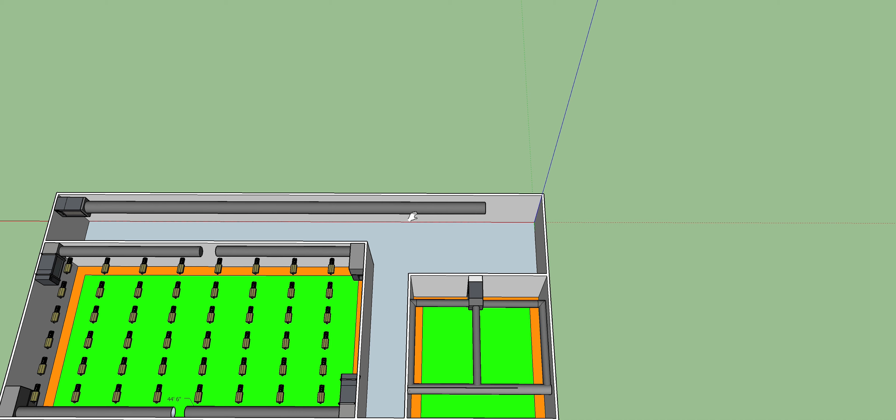Today we're going to cover the size of a craft grow space. So as you can see in this rendering, we've got a very densely populated flower room with some nice airflow out in the hallway with a nice 45-foot fabric ducting, as well as a dry cure over here in the bottom right corner.

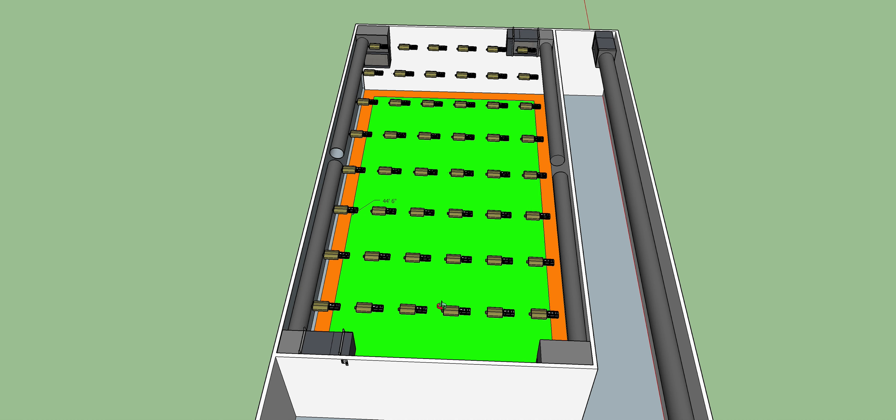With all the grow lights inside this flower room, it is a super dense space with all the ducting running down the walls to maximize being able to hang all your lights in a proper grid pattern. We kept all the fabric duct out of the way and off the ceiling so the lights can be evenly spaced, and we can direct the airflow right into the middle of the canopy, right into the middle of the space, to make sure that we are eliminating any hot or cold spots.

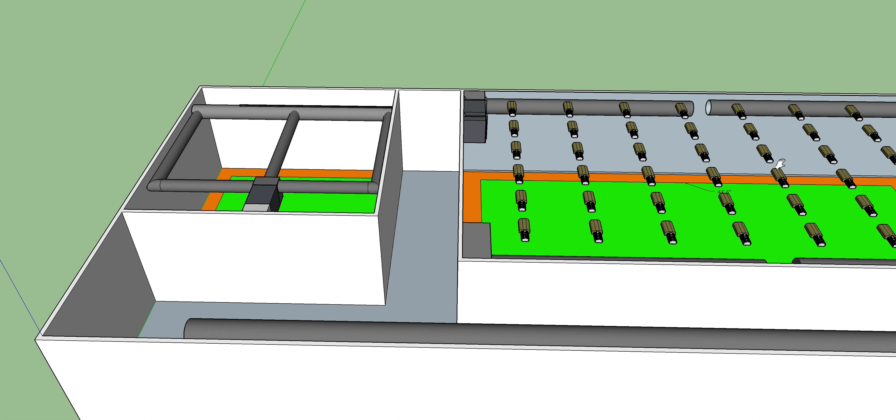The one awesome thing about this setup is you've got a custom dry cure. Now these custom dry cures are the only things that are specialized for drying and curing cannabis for the highest end product, to pull out all your terpenes, your crystals, and all the different flavors that you can grow in your cannabis.

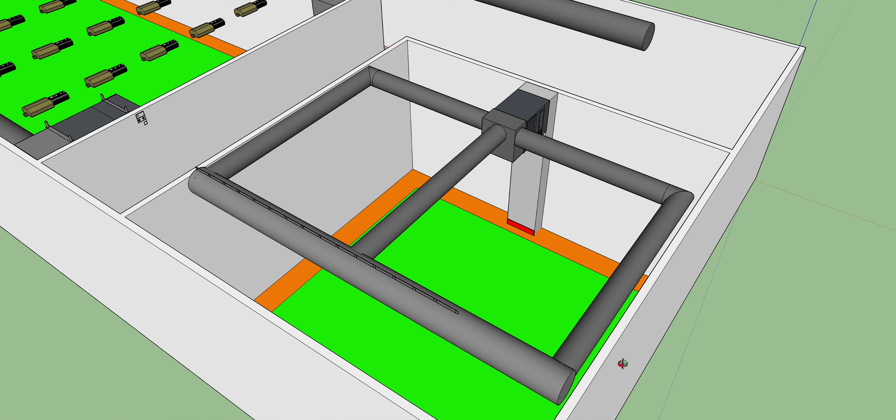In this space, we have a 2-ton system hanging from the ceiling, and we've got a front plenum with a bunch of fabric ducting coming out of it. It goes around the circumference of the whole room as to not touch any of the side walls. And all the airflow that comes out of the system goes down the walls, bounces back up off the floor and into the racking or into the way that the customer is hang drying it possibly.

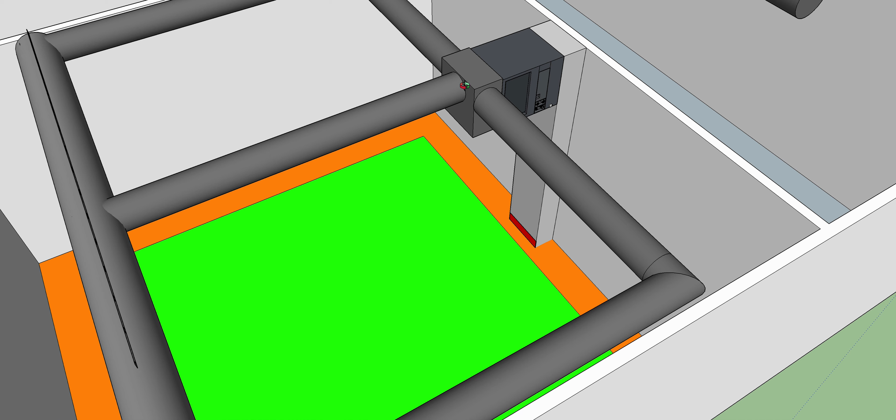The return air on this system runs all the way down the back wall and essentially is going to be pulling all the hot air from the bottom of the room right back into the return. So this middle ducting you can see is a special duct, and it's used in NASA and pill factories as to not blow any air directly onto the product.

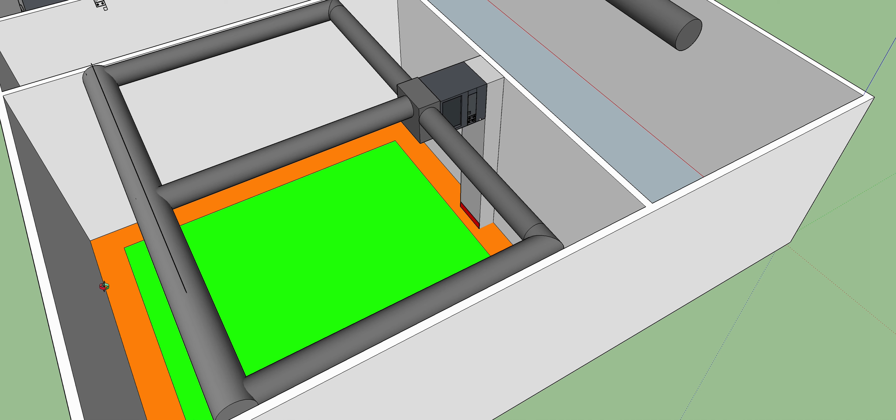So they use it for any dusty applications, or especially for bottling pills because there's a little bit of dust. You don't want that blowing around the space, so this air essentially rains down through the middle of the room, pulling all the hot air and moisture back to the return air of the system. So this essentially is what we've released to the public, and we found it to be one of the best ways nowadays to dry cure and to finalize your product for sale.

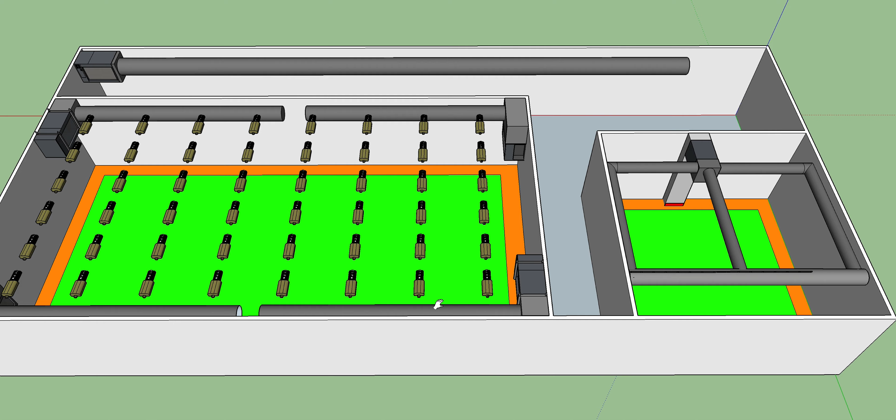Being a craft grower, you're limited to a certain amount of space. This would be the size of any small commercial application or the basement, anything that's around 1,500 square feet to 2,000 square feet, and you would have everything taken care of in that space.

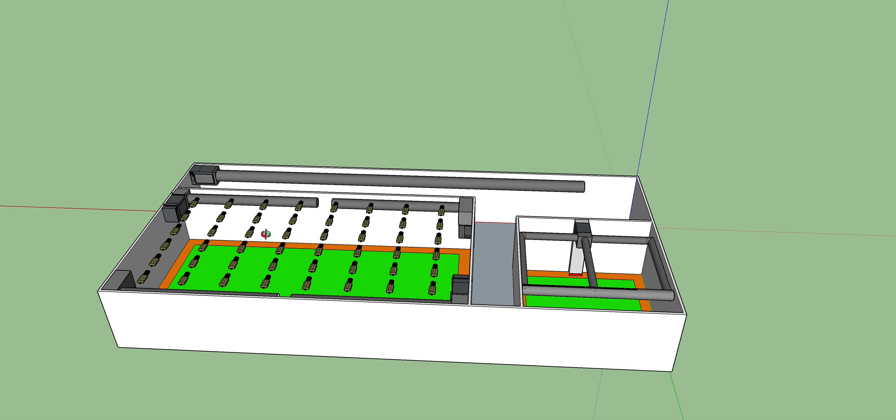All of our systems are designed for cannabis and designed for what growers are trying to do inside their spaces. As things constantly change, we are constantly changing with it, as well as adapting our systems and things to what growers need the most in the cannabis industry.